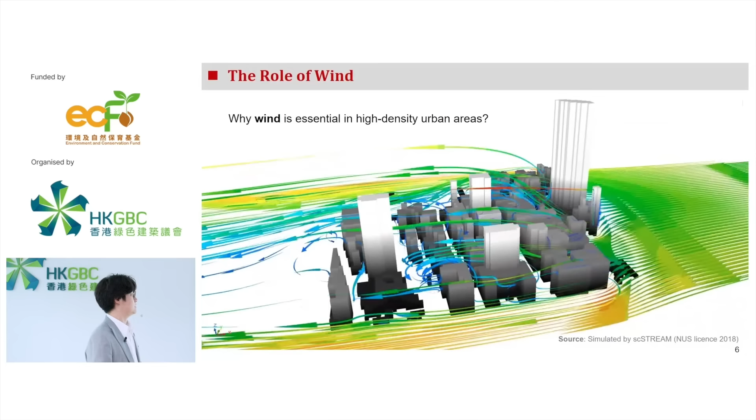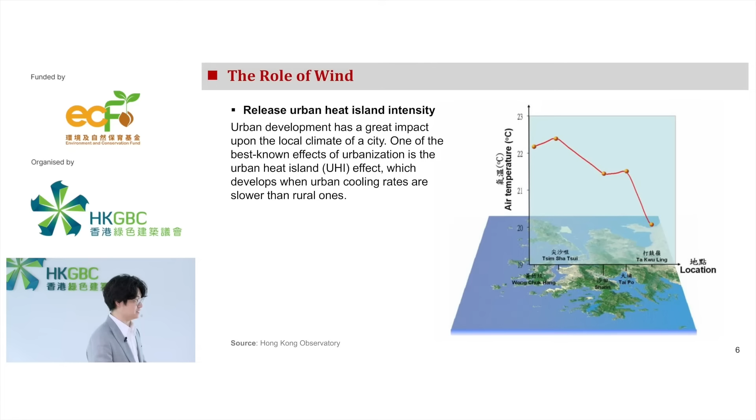In the spatial dimension, we feel warmer and hotter in urban areas compared with rural areas in the same city. This is because urban development has a greater impact on the local climate of a city. One of the best-known effects of urbanization is the urban heat island effect, which develops when urban cooling rates are slower than rural ones. This figure, captured from the Hong Kong Observatory's website, shows that the temperature difference between the city center and rural areas in Hong Kong can be over 2 degrees Celsius during nighttime, meaning we feel hotter at night in Hong Kong's urban areas.

Consistent with these findings from the Hong Kong Observatory, we recently conducted an observation study using over 100 automatic weather stations across Hong Kong and Shenzhen to investigate the magnitude of the urban heat island intensity in this region. We found that during the study period, summer 2022, in the urban high-rise areas of Hong Kong, urban heat island intensities exceeded 2 degrees Celsius, consistent with the findings reported by the Hong Kong Observatory. We also found that in Shenzhen, this number is even larger, reaching up to 3.3 degrees Celsius, meaning they may be suffering more discomfort due to extreme heat.

So this means that for people living in urban areas, we may need more wind to cool down our urban surface and to make ourselves comfortable. And in the temporal dimension, we will feel hotter today compared to 100 years ago.

This is again a record from the Hong Kong Observatory, showing that in the past 100 years, there is an increasing chance of extreme hot weather events during daytime and nighttime in Hong Kong. This is because of climate change issues and temperature rising globally, so our temperature is growing.

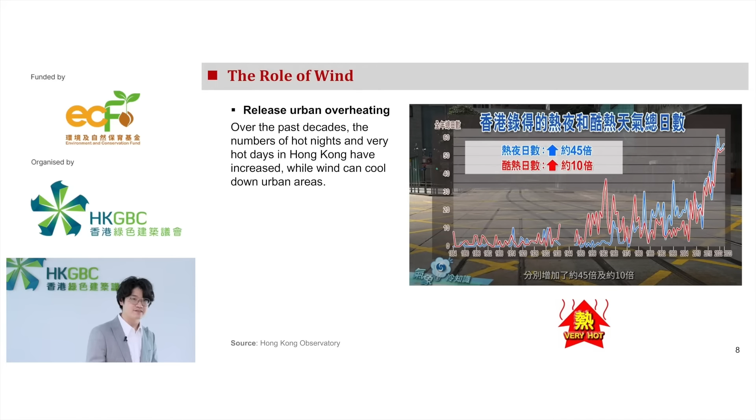In a larger scale, in a calm condition without ambient wind, traffic pollutants and anthropogenic heat may accumulate over urban areas. In comparison, under windy conditions, these emissions are advected downwind and dispersed outside the city. We call these two phenomena urban dome and urban plume.

This again demonstrates that if we have wind, we can have better air quality and we may have a more comfortable atmosphere in our city.

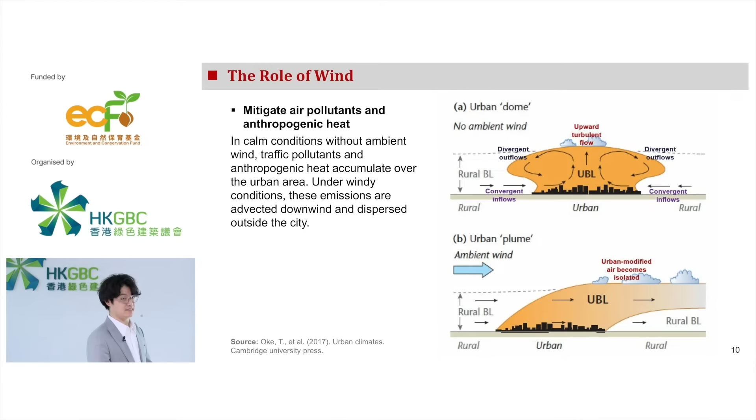More than the benefits we can obtain outside, for the indoor environment, we can also get benefit from wind. Another role of wind is to improve air quality. With good ventilation, the concentration of aerosols and airborne virus particles is reduced, and they are removed from your home more quickly compared to conditions with poor ventilation.

So we now know that we can get a lot of benefits from wind. The next question you may ask is how urban morphologies influence wind behaviors. Without knowing the answer to this question, we may not be able to better decide how to design our buildings so that they can adapt to the climate change, adapt to the ambient wind conditions.

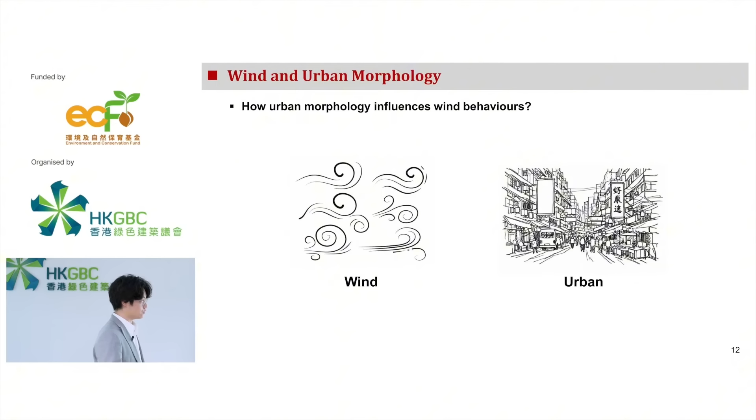We are going to answer this question in the following part. Urban climatologists are very smart. They try to find the answer to this question by using two simple and basic urban units, because they know that if they study the relationship between urban morphologies and the wind environment using the complicated urban system, the answer may be more difficult to find due to so many uncertainties with complicated urban morphologies.

But by using isolated buildings and urban street canyons as examples to show the relationship between wind and morphology, the answer can be more clearly obtained.

By studying this climate process within these two basic units, the isolated building and the urban street canyon, scientists seek to identify general wind behaviors and integrate these findings to explain airflow patterns at the city scale. For these basic units, for example isolated buildings, they figure out some basic air movement patterns.

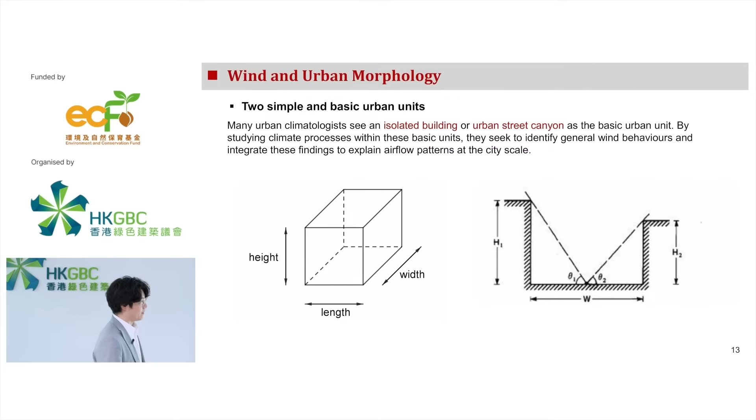At the lateral side of an isolated building, we can also observe patterns of flow separating from the prevailing wind. This is because the building obstructs the original path of the prevailing wind, making the flow separate at the corner of the leeward side of the building.

From the left-hand side to the right-hand side, they define zone A, zone B, zone C, and zone D. Zone A is the upwind area, which is an unobstructed zone, or we can call it a free stream velocity zone. So here the wind is not affected by buildings. And when the wind approaches the building and goes over it, we move to zone B.

This one they call the displacement zone or transition zone, so the flow is transitioning here. Then at the immediate leeward wall side of the building, they call it the cavity zone, meaning the flow here recirculates, and usually has a weak wind speed but a strong turbulence intensity. So the wind here is quite weak.

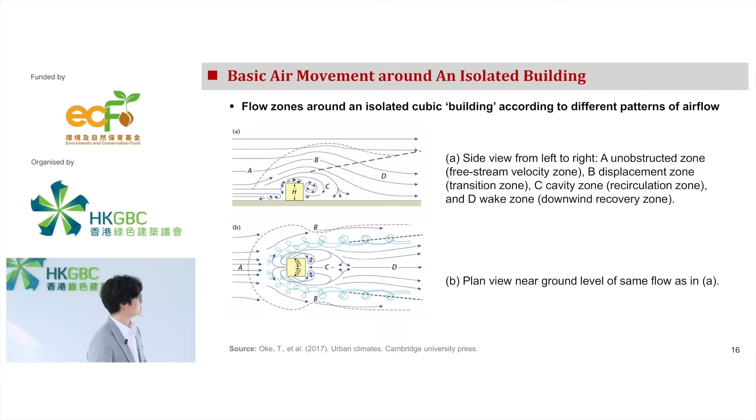The air movement is also affected by the shape of the buildings. If we put the building in this way, with the longer facade, the longer dimension of the building perpendicular to the prevailing wind, they will generate a larger cavity region, and this weak wind region will be large because the frontal area of the building facing the prevailing wind is large. In this situation, we will have a higher form drag.

This generates higher form drag but lower friction drag, which is not good for air passing through these regions. But if we put our building this way, with the longer facade parallel to the prevailing wind, the wind can more easily pass through the buildings, and they will have lower form drag and higher friction drag accordingly. So they will more easily pass through, and the cavity behind the building may be smaller, and the weak wind regions can be reduced.

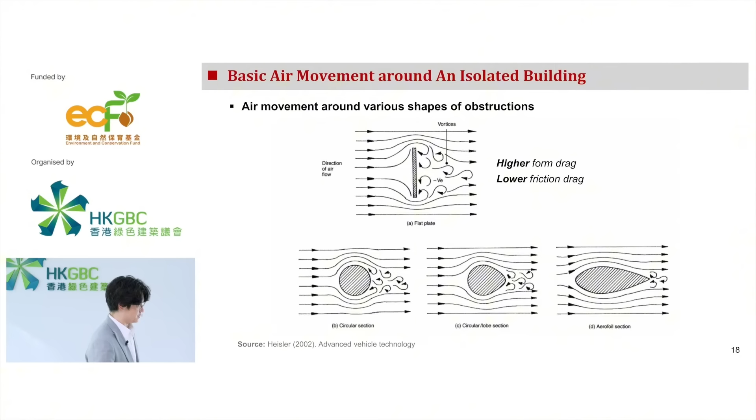So after talking about some basic air movements around the isolated building, let's go talk about another basic unit, the street canyon. A street canyon actually consists of one street and two buildings at its left and right side. The scientists also identify some basic air movements within this basic unit, the street canyon.

Another effect is called the Venturi effect, meaning that when the wind has to pass through a small opening, the wind speed will also increase. So this is another method by which we can accelerate the wind.

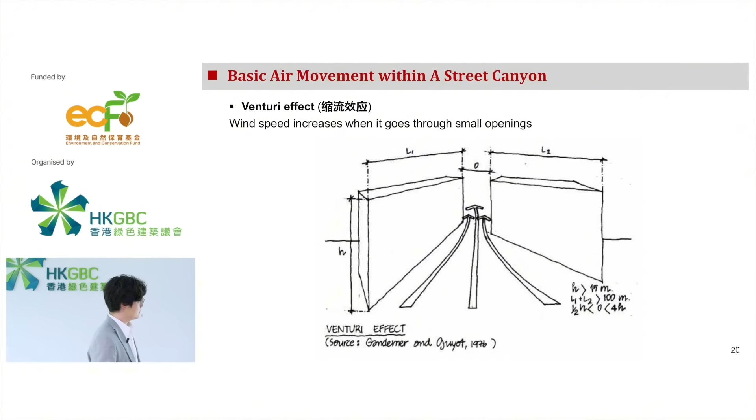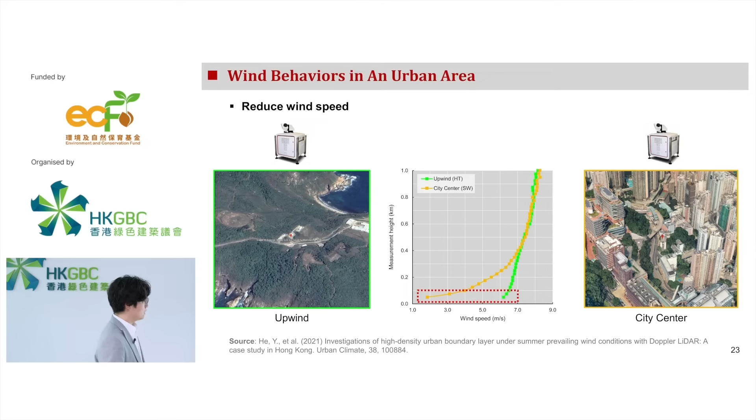In this example, we put the LiDAR equipment, one in the city center at Hong Kong U, and another at the upwind area at Hok Tsui. The terrain here is normally covered by vegetation, so no urban construction is here, while here is one of the high density urban areas in Hong Kong. This is what the equipment looks like.

We can see the observation we have. This profile represents the one we measured at the city center, Hong Kong U, and this green line represents the vertical wind speed profile we measured at Hok Tsui, the upwind area. You can see that the wind speed reduction is over 4 meters per second. This is a huge wind speed loss, meaning we actually have enough wind resources in Hong Kong, but when approaching our city center, the wind speed is reduced, so we cannot benefit from this high wind speed, especially during the summer.

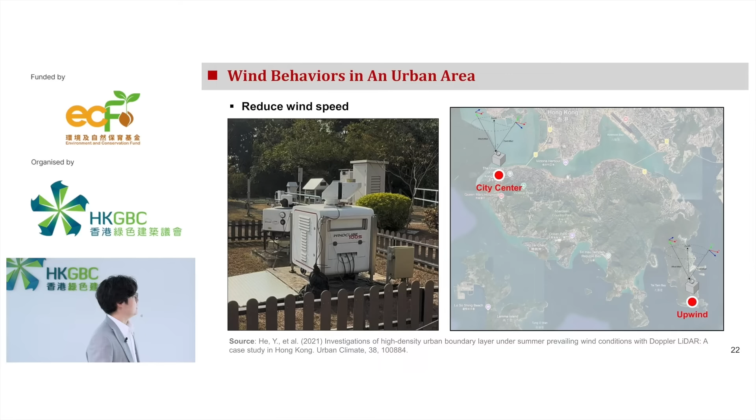Related to this wind speed reduction, we have a term to describe this phenomenon. Usually we call them shelter effects or wall effects. Hong Kong has many wall buildings because of the insufficient land supply. So we build these buildings in a compact style, making them shelter the wind, and they also block the incoming winds so that the wind will be reduced after passing through these wall buildings.

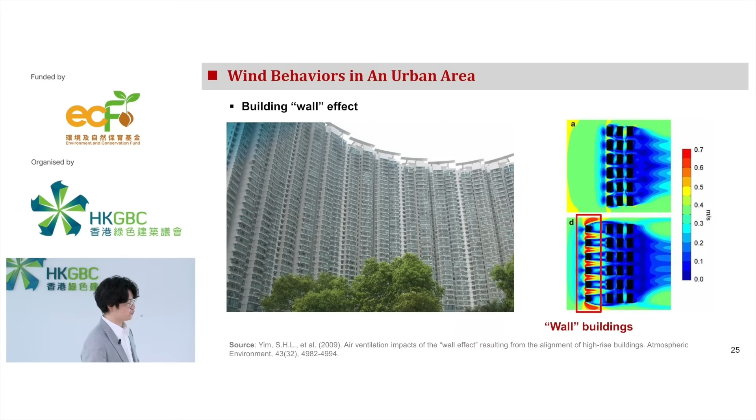This is an example I found online, a CFD simulation conducted by previous research, showing that if we add one block of wall buildings, the wind speed is reduced significantly, so you can see many more blue areas here at the downwind side of these wall buildings.

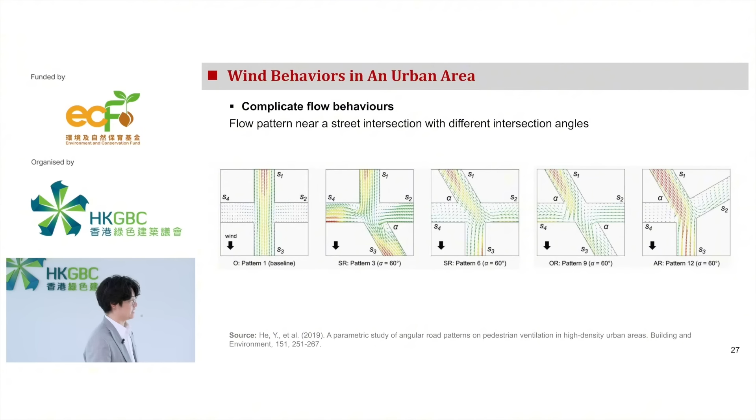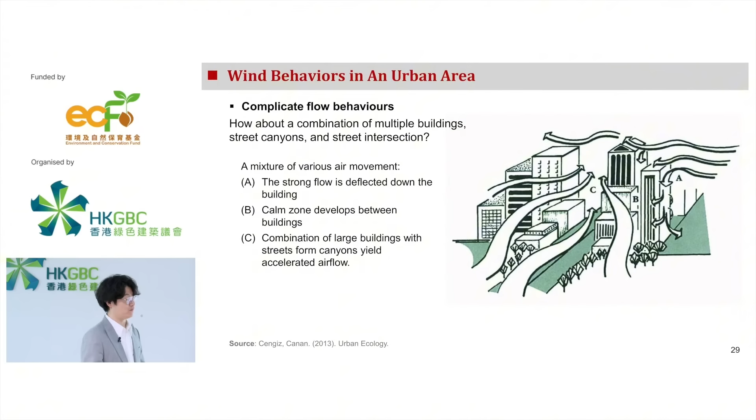So how can we understand the relationship between urban morphology and wind behavior in such complicated urban systems? Scientists introduced a concept to help us better describe or quantify this relationship.

With this understanding, we can further define the urban boundary layer. What is the urban boundary layer? It means the boundary layer over an urban surface. This is how we define the urban boundary layer.

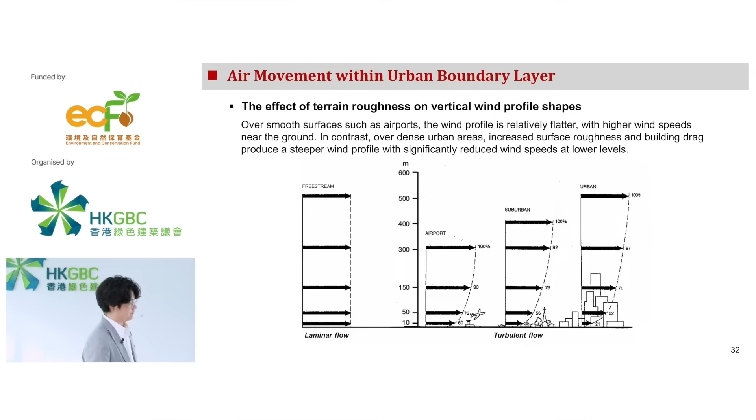If we compare it with high density urban areas, you find that the wind at the bottom is much smaller compared to the airport case, and the curve of this vertical wind profile is steeper, meaning the height of the urban boundary layer is higher than in the smooth surface case. By understanding this, we can identify to what extent our urban surface roughness impacts the vertical wind speed profile.

Okay, so we have finished section 1. This section's information can help us better understand the following parts of today's study, because I will go into a more practical part to introduce the building and urban ventilation design guidelines in Hong Kong. Most of the strategies are based on the understanding of the theory I introduced just now in part A, section 1.

So this is the first guideline I would like to introduce to you. Perhaps many of you already know these guidelines, but I still want to give an overview so that we can better link to section 3 and section D. This urban design guideline provides many air ventilation related design strategies, subdivided into district level and site level. I will go through them one by one.

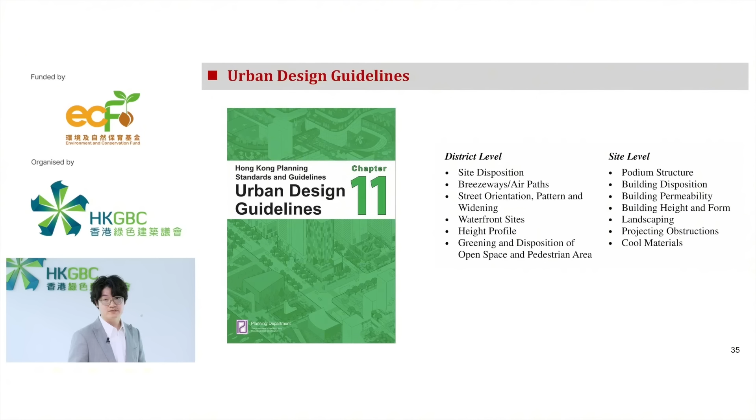This is the first strategy at the district level. It requires us to divide the site into parcels to avoid long and linear site geometries. Because of the building regulations used in building design, in the city center at Tsim Sha Tsui we can easily find these linear and long buildings in these regions. This building design is actually not good for air ventilation.

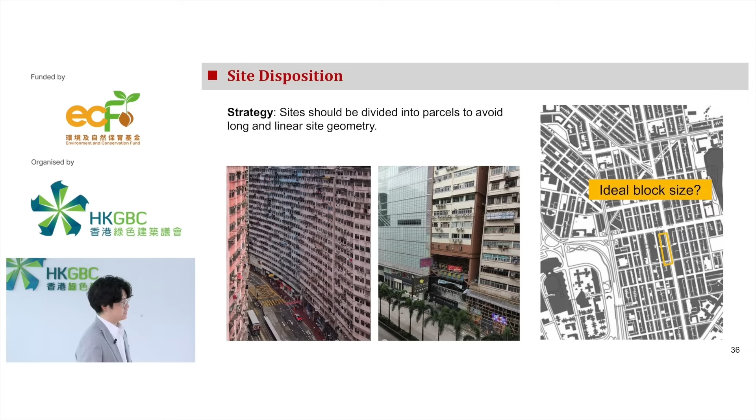So the guideline, the strategy, suggests separating this into parcels so that more wind can be introduced into the gaps between buildings and into the downwind side of the building. Here is a design example. It's not a real design example, but a conceptual one that we can find from previous research.

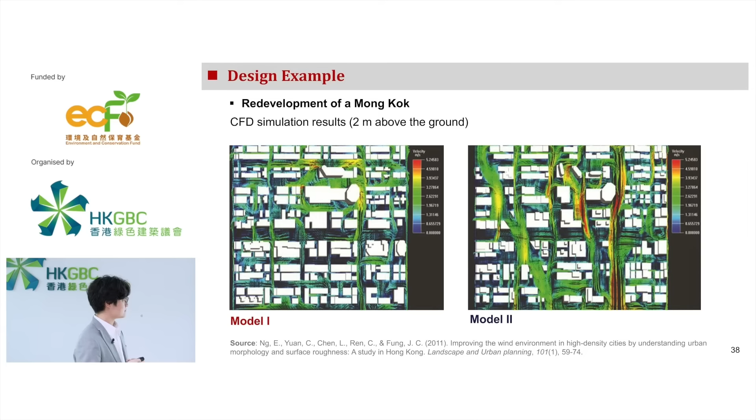This site disposition strategy can actually be extended to the seafront area. This is another strategy from this urban design guideline: they highly recommend separating buildings and dividing the site into small parcels near the sea.

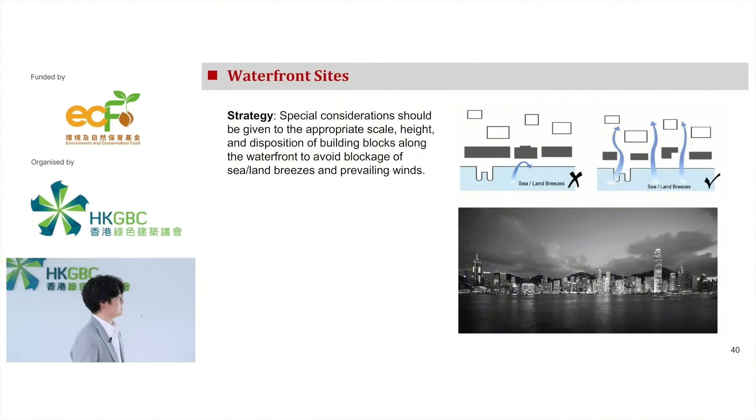This is because wind will come from the open areas at the open sea, and this is actually the major source of strong wind. If we block this area, then the wind is not able to enter the seafront area, and it cannot penetrate deeper into the city center. That's why they suggest these strategies to improve waterfront design.

A very famous example is the design of the Hong Kong SAR government's headquarters. Their building is exactly at the seafront, but to avoid this huge building blocking the prevailing wind from the sea, they dug a large hole, so the wind is still able to pass through this huge building and enter the downwind regions.

By using this, the wind can not only benefit the building surrounding area, but also the downwind area of these buildings. So this is a very famous example of AVA in Hong Kong.

The next strategy is to build breezeways and air paths. We have many separate breezeways, like roads, linear parks, low-rise building corridors, and also building setbacks and non-building areas.

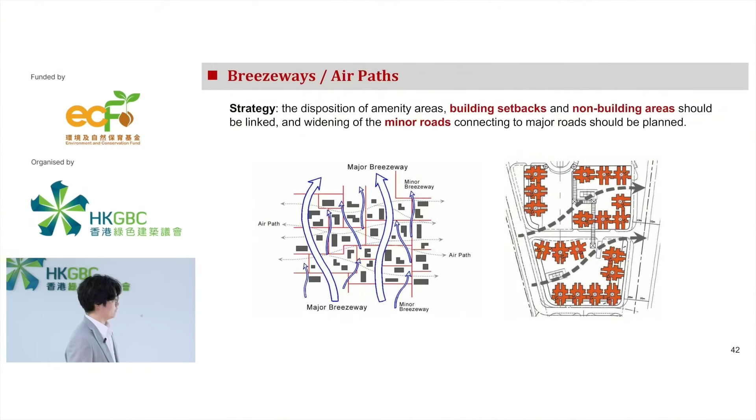But if we don't connect them together, it will not become a breezeway network, and it won't be efficient for wind to flow through our large urban areas. So this guideline suggests connecting all these small, major and minor breezeways into a network of breezeways and air paths.

Another strategy tells us that street orientation is related to airflow behavior. If we can better align our main street orientation to the prevailing wind direction, we have a better chance to attract more wind into our urban building arrays, achieving higher wind speed.

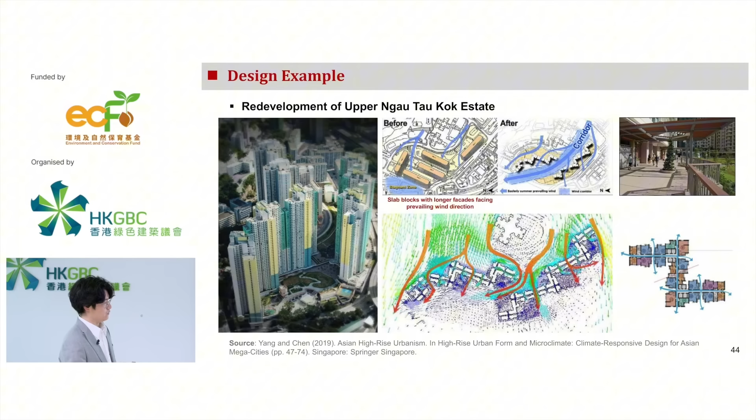This is another good design: they tried not just to build this major corridor, but also introduced some minor corridors, so that even when wind comes from a different direction, they can still have very good ventilation.

So the next strategy is street widening. As I introduced earlier, if the street is too narrow, the wind will skim at the rooftop level and cannot enter down here.

But if we try to widen the streets, then the flow may be possible. More flow can be entered into these streets, enhancing the exchange of air inside and outside, so that we can have better air quality and a more comfortable wind environment.

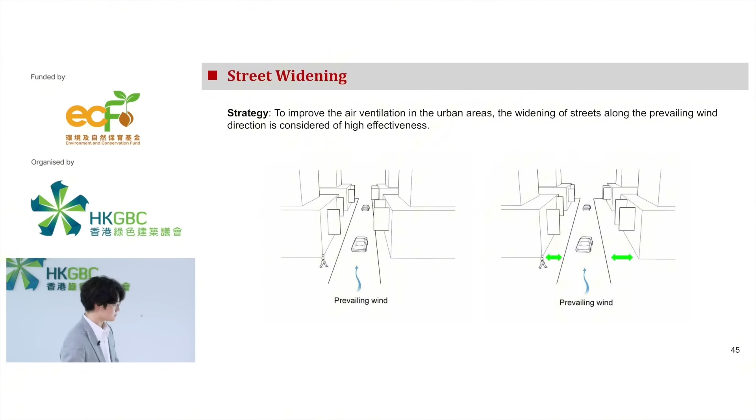Okay, so another strategy is the height profile, so-called downwash effect. If we build buildings at the same height, the downwash effect is not possible. But if we build buildings at different heights, they will make the flow behavior more diverse, and the downwash effect will occur.

From the left-hand side figure, we can see the buildings are built in this way: this is the upwind building, this is the downwind building. The upwind building is lower, and the downwind building is higher. In this way, the wind can pass through more easily because there's no blockage.

When the wind approaches the taller downwind building, it forces the flow down, generating a high pressure region at the windward side of the building. Because here is a high pressure region and there is a low pressure region, this pressure difference accelerates the flow, and we see a higher velocity here.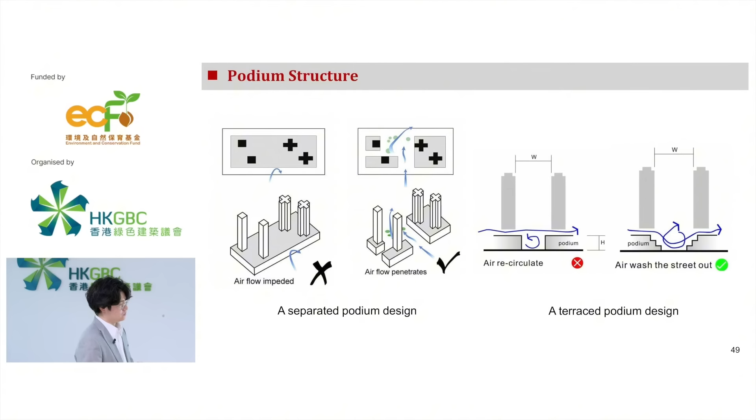This set of diagrams tells us another important strategy: increasing the permeability of our buildings and urban areas. There are different strategies, but the main concept is that we need to dig more holes, introduce void decks, and change the orientation of buildings so that we have less frontal area facing the prevailing wind, giving the wind more room to enter our building complex and bring more airflow into our urban and building design.

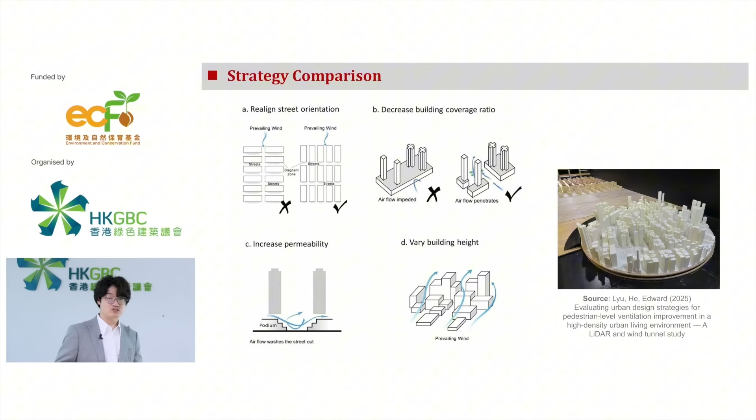Although the urban design guidelines give us many good strategies to consider for improving our air ventilation, the guidelines don't tell us which strategy is better or when we should use which strategy. We don't know this answer.

Recently our team did wind tunnel experiments to compare four different strategies recommended by the guidelines: realigning street orientation, decreasing building coverage ratio, increasing permeability, and varying building height. We used one site at Mongkok as an example and conducted these four redevelopment cases.

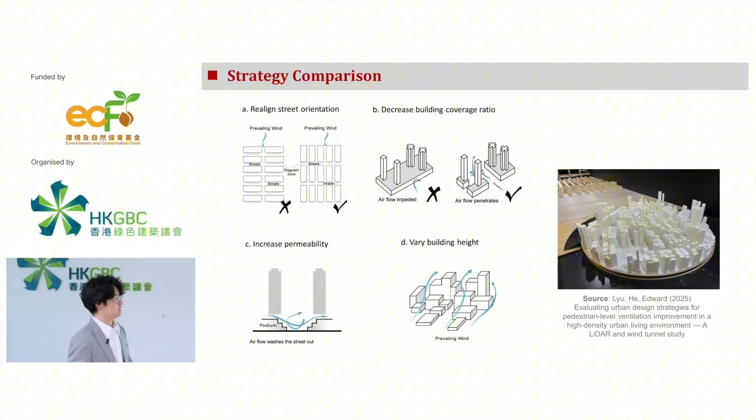This is another study. We further compare the strategy to link the breezeway and to widen the breezeway, comparing these two strategies independently, and also combining them together. We found that because Hong Kong's city center is very dense, relying solely on linking the breezeway or widening the breezeway may not be sufficient to improve the wind.

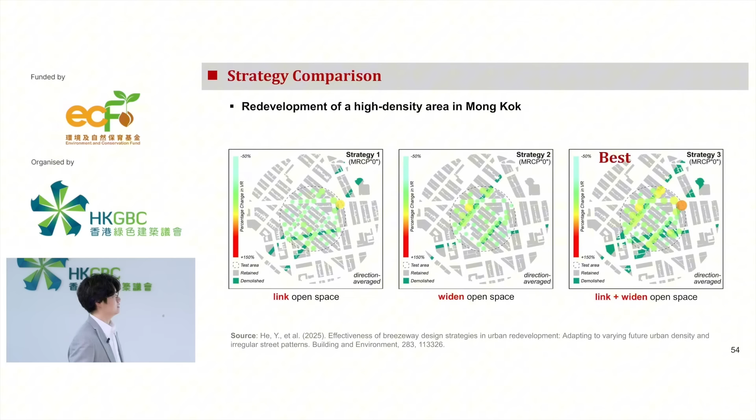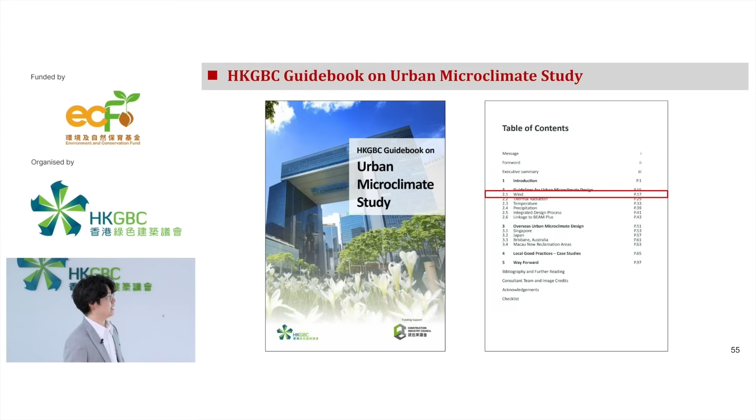This urban design guideline provides us most of the important qualitative recommendations. The HKGBC also has a guidebook on urban microclimate studies, and one section is related to wind. They provide many innovative diagrams showing quantitative design strategies for improving air ventilation. If you're interested, you can definitely have a look, but I will not repeat this strategy in this lecture due to time limits.

So let's move to the next guideline: the Sustainable Building Design Guideline. The difference between this guideline and the Urban Design Guideline is that the Urban Design Guideline looks at the site and district scale, while this one is more at the building scale. The next difference is that the Urban Design Guideline only provides qualitative suggestions, but the Sustainable Building Design Guideline provides quantitative suggestions, including quantitative metrics for us to control the geometry of the buildings and the street.

There are three key building design elements related to wind. One is separation—increasing the separation, increasing the building setback, and increasing the site coverage of greenery. But that last one isn't related to wind, so I won't highlight it in this lecture.

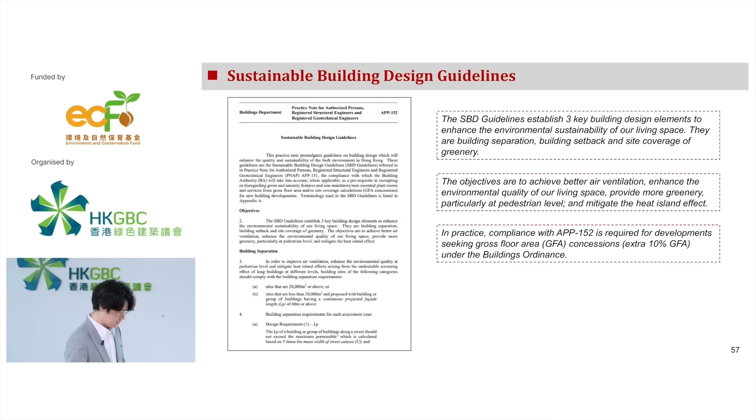The first parameters introduced to us are LP and U. LP is the continuous projected facade length, and U is the width of the street canyon. How can we use these two parameters? They're actually one pair of parameters, and they tell us that we cannot build our building with too long a facade.

So the relationship is: we should not build our building so that the maximum allowance of the length of the building is more than 5 times the width of the street next to it. In this example, there's a different width of street adjacent to the building, so we can only take the narrowest one as the reference for these calculations—meaning the LP dimension of the building is actually 5 times this narrower street, but not the other one.

And this one is the same. The LP maximum is 5 times of this one, but not this one, because this one is narrower than this one. So we cannot use this one as a reference to do the calculation. We can only use this one.

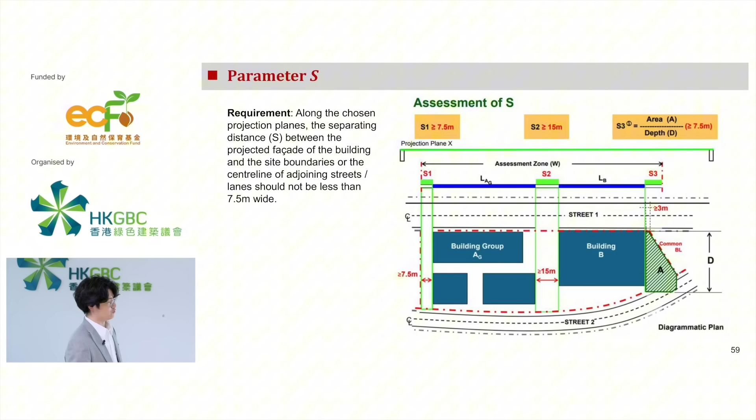Okay, the next one is the S, which means the separating distance. How they control this S is that between the projected facades of the building and the site boundary or the center line of the adjoining street, the length should not be less than 7.5 meters. So if this is the street, this is the center line of the street. Between this center line and the building's projected facade, the minimum distance is 7.5 meters. And if this is the site boundary, between the site boundary and the projected facade of the building, the minimum requirement is also 7.5 meters. So this is how they control this S.

The next one is permeability. Permeability means we have vertical sections to do the assessment. They have 2 types of permeability elements: one is called intervening space, shown in white color, and another is the permeable elements, PE. So the total area of this intervening space area plus this permeable elements area, divided by the total area of the vertical section assessment area, has to fulfill the minimum requirement of 20%. There are more detailed requirements for different situations, but for most of them, it has to be not less than 20% total permeability.

So we know these 4 different quantitative control metrics from the Sustainable Building Design Guideline, but actually we have more parameters or metrics that can control building performance in terms of better ventilation. One famous indicator is called frontal area density. This is similar to permeability, but permeability calculates the ratio of openings exposed to the prevailing wind, while this one calculates the frontal area of the building exposed to the prevailing wind. Different calculation, but similar meaning - they're all controlling the permeability.

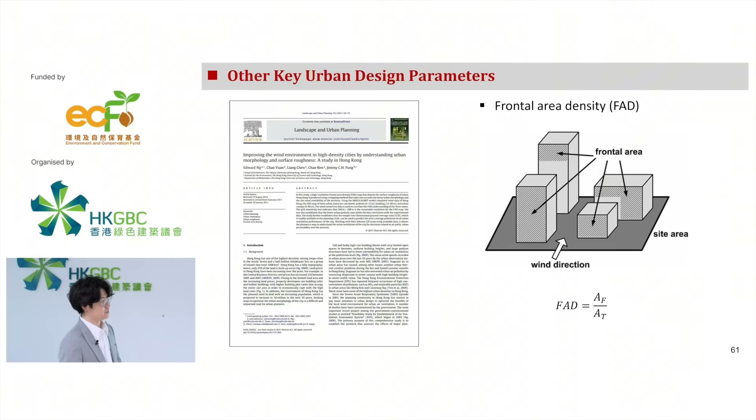In Japan, in the CASBEE system, they also have similar indicators. They call this one percentage of exposure area, and you can see they are quite similar - they have this vertical assessment section, and the frontal area of the building, and they calculate the ratio of the building area to the assessment section area. There's also one called building spacing index, which is actually quite similar to the aspect ratio, but when calculating it, they use a section parallel to the prevailing wind, whereas this other one uses a section perpendicular to the prevailing wind.

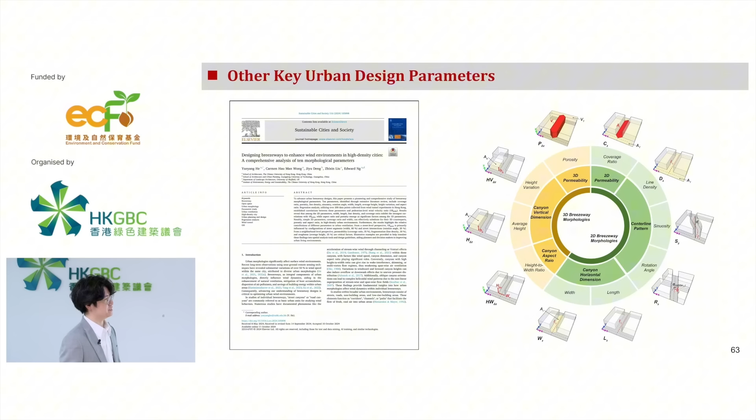We also did a literature review on other important parameters to control the design of open space. According to our literature review results, we summarized 10 most important parameters related to air ventilation performance: building coverage ratio, the plan area ratio, the line density of the street center line, the sinuosity and orientation angle of street intersections, the length and width of the street, permeability, average building height, height variation, and the aspect ratio. Most of these have already been covered in my talk in the previous parts.

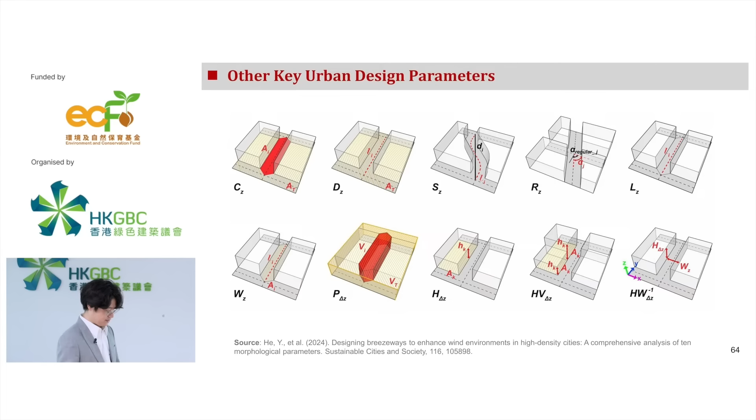What I want to highlight is that not all of these indicators attract enough attention. The most frequently used parameters are coverage ratio, building aspect ratio, building coverage ratio, and permeability. We can also see that height variation, aspect ratio, and wind-to-street angle have more attention, so they are more widely used. So you can find that these 5 indicators may be more frequently used and can attract more of your attention.

Okay, so this is section 2. Now going into section 3, the methods to assess urban wind enhancement. So after the introduction of some background information of the aerodynamic knowledge and the practical aspects related to our building and urban guidelines, we finally move into the method part.

For the method part, we have 3 main methods that are commonly used to study the urban wind environments. This is the classification according to a very famous book called Urban Climates. If you are interested, you can borrow it from a library to read.

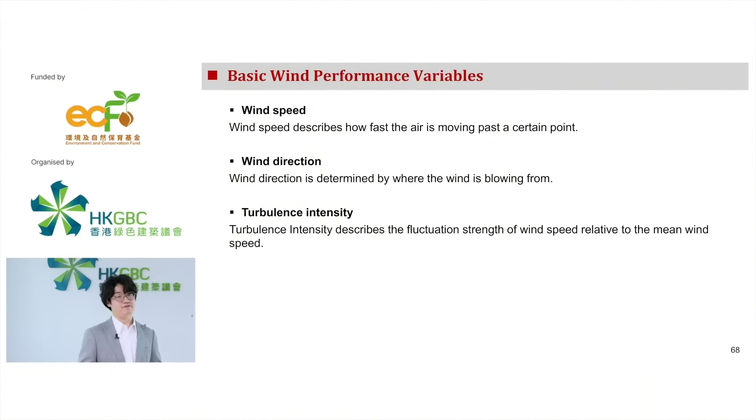This is also important because when we do CFD, we need to input the wind speed as the boundary condition, and we also need to input the turbulence intensity as the boundary condition. We also need to define where this wind is coming from—that is the wind direction. So we have to know these three wind performance variables, otherwise we cannot finish our boundary setting for the CFD.

So there are actually three types of field measurement. The first one we call the fixed measurement type—we have equipment fixed on a particular point to do measurements at that fixed point, so this is called fixed measurement.

And if we put this measurement equipment on a vehicle and it is mobile, then we call this measurement type mobile measurement type.

Sometimes we also need to measure the wind not just near the ground, but also at vertical direction. So what we can do traditionally is put our sensor or anemometer in a balloon, and then the balloon will rise.

And then when the balloon rises to different vertical levels, it can do measurements at those different levels. This is called flow following. It is also one of the mobile measurements, but in the vertical direction. So this is the basic way we can do the measurement.

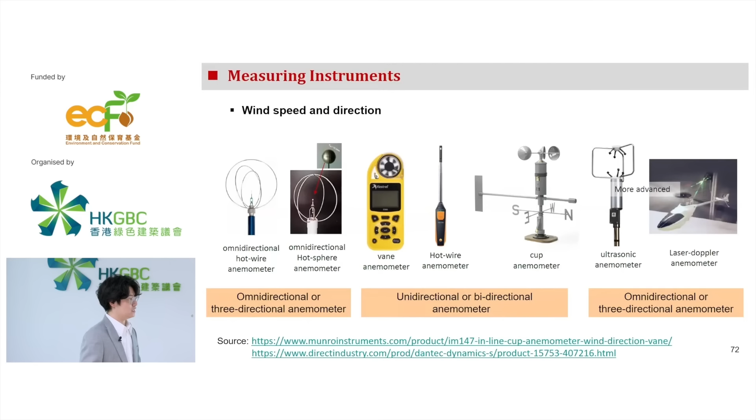And if we don't have money to purchase the anemometer—because they are expensive—and if we don't have a project to support it, it's quite difficult for us to buy an anemometer by ourselves.

But we can actually obtain this data from Hong Kong Observatory. They have free data sets on their website. This is the location of all the automatic weather stations and other weather stations distributed across the whole territory of Hong Kong, and some of them provide wind speed and wind direction data on an hourly and daily basis.

So this is one of the examples I found from their website. They have many different types of equipment, and we can find this equipment measuring different variables of the climate. Some of them are handling wind speed - this one is the anemometer. So they have the anemometer that can obtain wind direction and wind speed.

And the next main method is modeling. So why do we need modeling instead of observation? This is because if we do observations, we can only know the measurement value from one particular point on the Earth, which may not be enough for us to do the air ventilation assessment, because we may need more test measurement points.

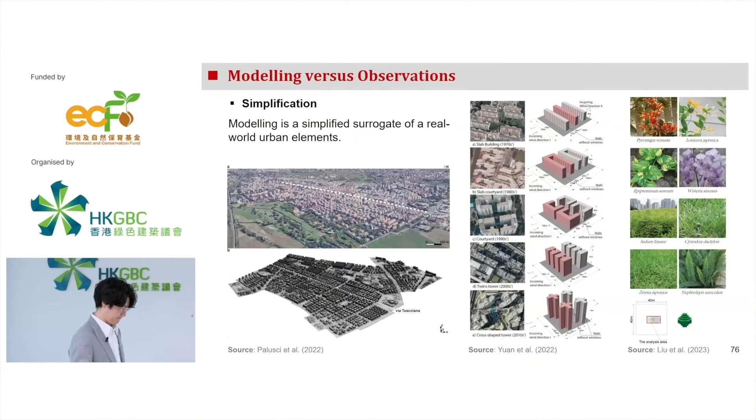So it means that modeling cannot help us capture all the features from reality - this is the disadvantage of modeling. We will lose some information from the real world.

Similarly, if we want to test different patterns of building designs - here are 5 different patterns consisting of four identical buildings but in different layouts - they can easily do it in a CFD simulation. But in the real world, it's difficult for us to do this comparison because we may not have enough budget to build these buildings only for an experiment. In CFD, we can do this simulation very easily and budget-friendly.

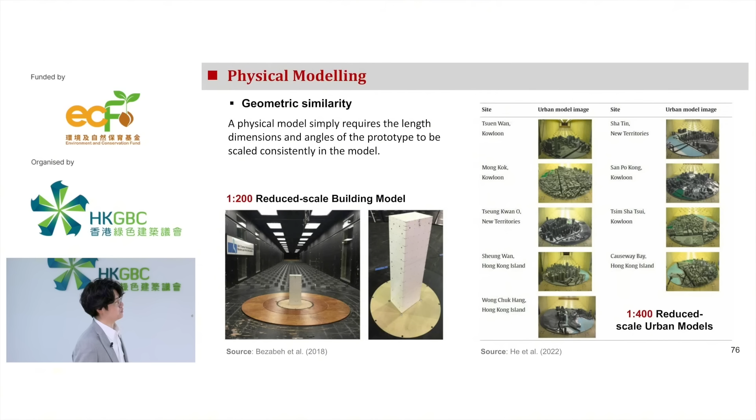So it means that a physical model needs to have the length, dimension, and angle of the prototype scaled consistently in the model.

This is the lab we used two years ago to do a wind tunnel test at Hong Kong University of Science and Technology. In this wind tunnel lab, this is the test chamber, a very simple chamber, but it actually has 6 faces: 2 lateral walls, 1 ceiling, 1 floor, 1 outlet, and 1 inlet. The inlet lets the wind come through, and the outlet lets the wind escape from the test chamber.

So what we did is that, because the very first step when we do the wind tunnel test is to reproduce the real-world vertical wind speed profile. If we have nothing on the floor, the wind speed will be similar from the bottom to the ceiling. In the real world, if the wind goes over a smooth surface like the open sea, the wind speed will be constant at different vertical levels. But when it goes through a rougher surface, the vertical wind speed will have a curve, and if the roughness is higher, this curve will be steeper.

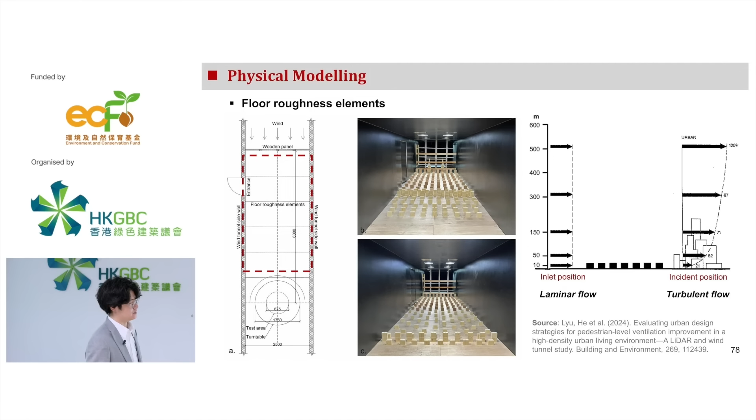So to reproduce this flow pattern, this vertical wind speed profile, we need to set up wooden blocks in the upwind area of the test chamber, so that they can simulate the roughness and the vertical wind speed profile observed in the real world. By putting this roughness at the upwind area, we can change the flow from the inlet from one curve to another.

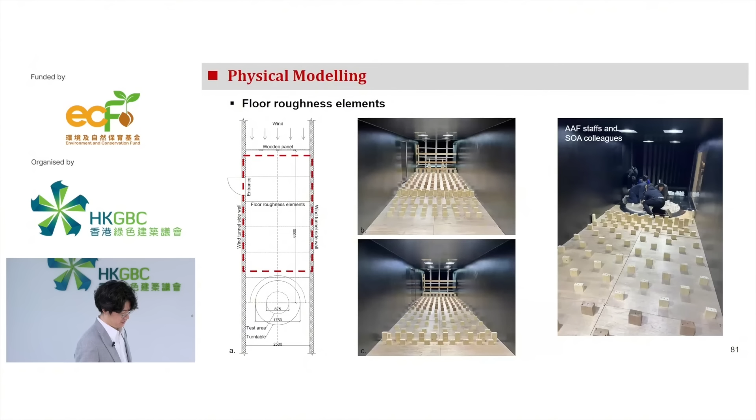This is the very first step, and this is our team and the staff in this lab. We worked together to set up this roughness at the upwind. After setting up the upwind, we have already calibrated the vertical wind speed profile.

The next step is to set up the urban model, because we need to test the wind performance at the pedestrian level in this urban area. So we need to put our urban model at the test area. There's a turntable here that allows us to turn the urban model placed on top of it, so that we don't need to manually rotate these models.

We need to rotate this model because it allows us to test different wind directions, since AVA and CFD require us to test 16 wind directions, from east, west, and north. After putting the building models on top of the turntable, we also need to put sensors at different places on the street. These sensors connect by cable, and the signal is transferred back to the receiver, which helps us collect the data.

So this is a video I found, and it can show us how a wind tunnel experiment looks like.

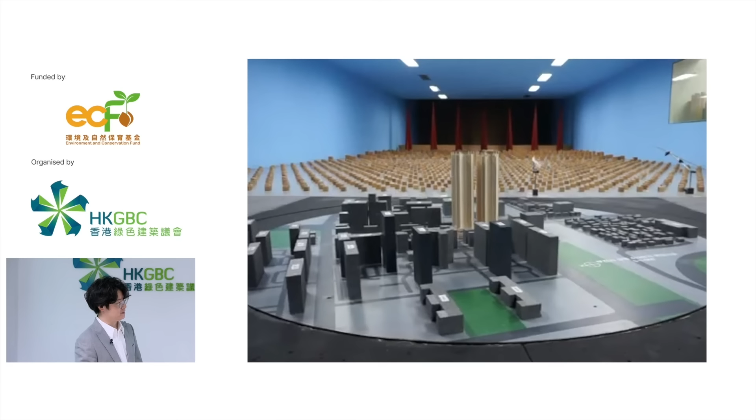You can see that the wind is actually coming from the inlet. This is the inlet, and these are the roughness elements. When the wind passes through this area, the vertical profile changes, and then it approaches the urban area. This is the turntable, and because it can turn in different directions, it can test 16 different directions to have a comprehensive assessment of the pedestrian level wind speed.

So this is an example I found to show you the physical modeling part. Okay, let's resume the lecture.

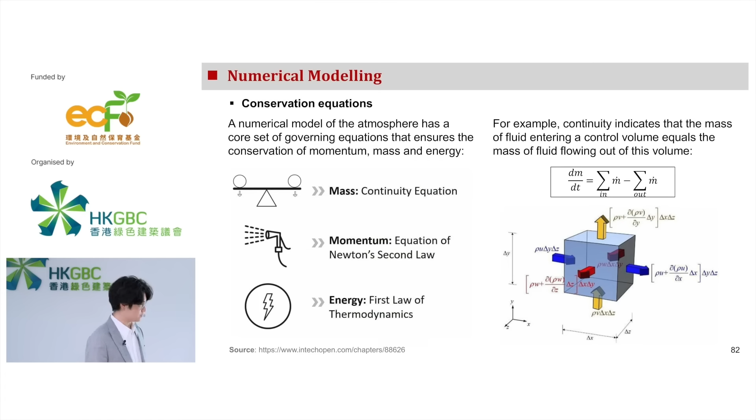We just talked about numerical modeling. The numerical modeling needs to solve different sets of equations, including the mass equation, momentum equation, and energy equation. We won't go through this part in detail, but let's move into other important parts of numerical modeling.

First, we need to understand that numerical modeling has different scales. From larger scales to smaller scales, it requires us to input different levels of detail in the geometries. For our AVA and CFD, we need to input the building geometries in a more detailed way. Actually, the CFD needs to handle the neighborhood and building level details. So this is the scale we are working in.

And the second part is the software. Actually, there are different types of software available in the market, and we can classify them into two categories: open source and commercial. Open source means it's free, and commercial means you need to pay.

The advantage of commercial software is that it comes with a graphic user interface, and some of them have technical support, meaning it's more user-friendly. But open source software, because it is free, most of them have no graphic user interface, and you may need to know some programming skills.

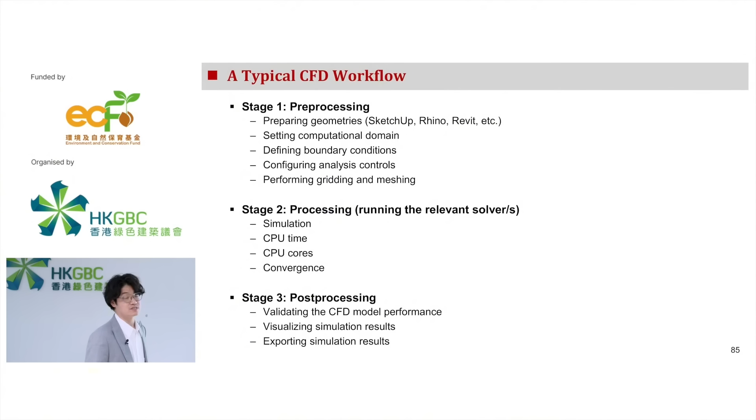Now we have talked about the computational domain. This is the first step when we do the CFD setting. Why do we need a computational domain? For example, we are going to test the wind speed of this target site. We need a domain because the real world has no domain, but we cannot put the whole real world into our CFD model, right? Because it's not affordable for the computer. So we have to tell it where the boundary is for the simulation. Okay, so this is the computational domain.

You may ask another question - I already answered why we need a domain, so the next question is why we need a bigger domain. Why can't we just use a smaller domain since our target is very small? That's because in the real world this domain boundary doesn't actually exist. If we put this domain boundary, it will actually affect the wind. When we run the simulation, this domain will affect the flow passing through it. If the domain is too small, it will impact the flow near the boundary, giving additional and unnecessary wind pressure to the flow surrounding the area, making the results around our target area inaccurate. That's why we need a larger domain.

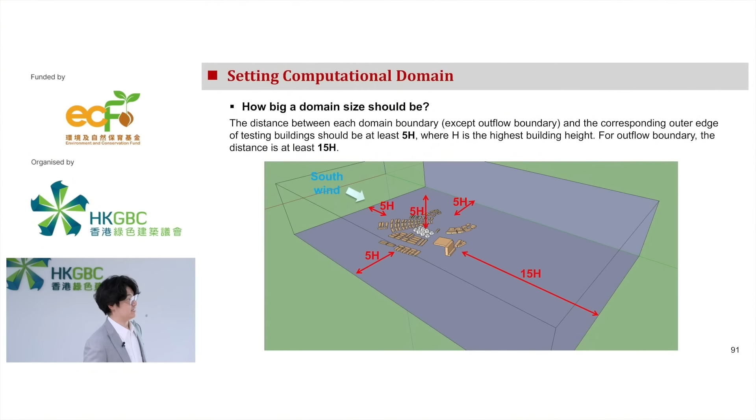This diagram further explains why we need a longer distance between the building and the downwind boundary. This is because the wake area, the flow recovering area downwind, is very long. So to ensure this flow can freely develop, we need a longer distance between the downwind boundary and our site.

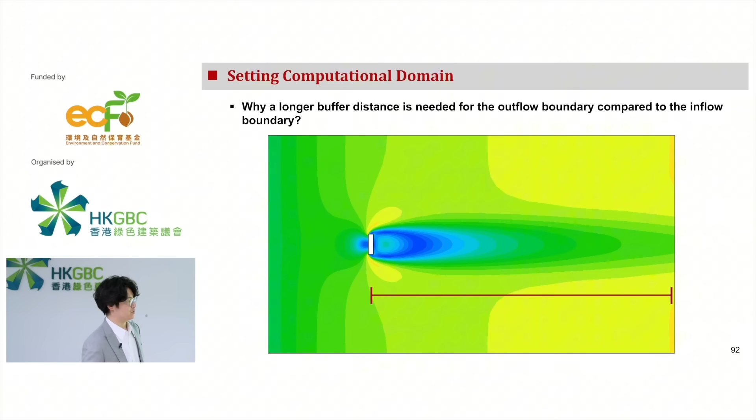After setting the domain, we also need to set the boundary, same as the setting we observed in the wind tunnel lab. We need an inlet, an outlet, two lateral walls, a ceiling and a surface. So we normally have 6 facades for simulation of an urban case.

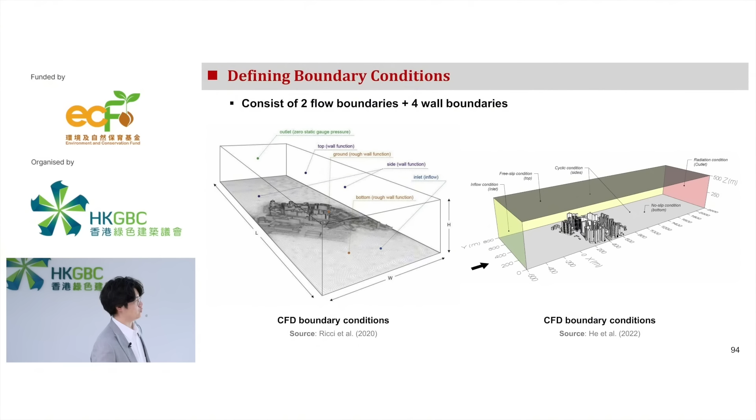For each different boundary, we need to set a different computational boundary condition. For the inlet, we input the inflow, and for this one we set the outflow. For the top and lateral boundaries, we set the wall function. For the ground surface, because we need the flow to experience some roughness before entering our urban area, we set the rough wall function.

After setting the domain and boundary conditions, the next step is numerical discretization. We need to tell the computer in what spatial resolution to generate the simulation results, so we subdivide our domain into different pieces. Each small space is a computational cell, within which we calculate a number of different variables. So one cell will contain one wind speed.

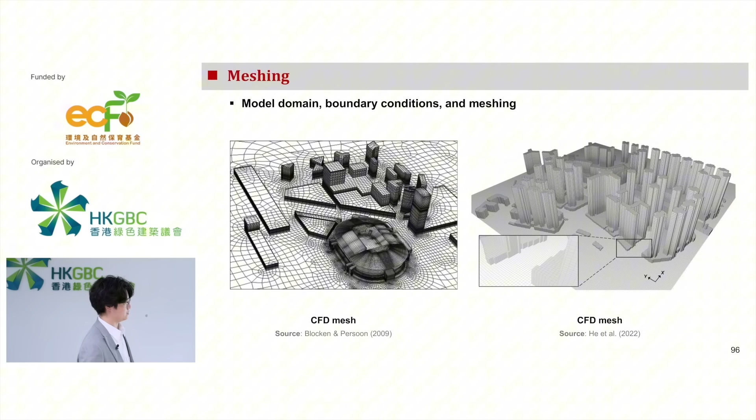This is how the mesh looks. We actually have two different types of mesh: unstructured mesh and structured mesh. Structured mesh is more regular and uses a Cartesian system, while unstructured mesh can better capture the details of building geometries, especially on facades or very small elements in our urban area.

After meshing, the next step is configuring the analysis control. There are different turbulence models we can select from: RANS, LES, and DNS. RANS solves only the time-averaged flow with a turbulence model. In our AVA tests, we are required to use RANS. LES and DNS take longer to simulate, but of course provide more accurate results because they solve all or part of the turbulence eddies. The cost is that you need longer computation time, so it is not required by the AVA at this stage.

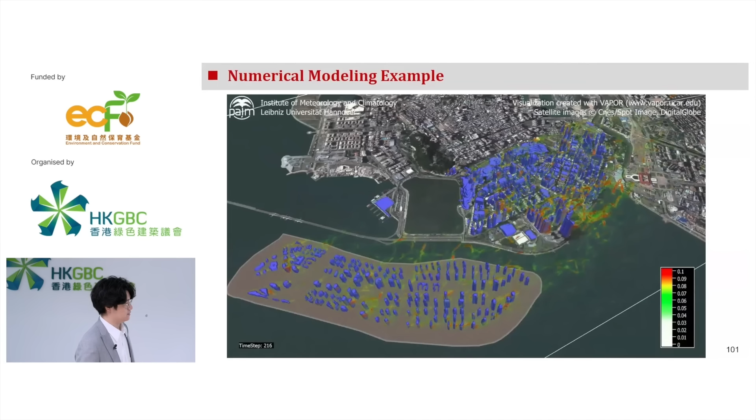This is an example I found online showing an LES simulation. This is one of the urban areas in Macau. This is just a simulation showing the flow patterns passing through this urban area.

To summarize this part, we introduced the observation and modeling methods, with their advantages and disadvantages. For field observation, the advantage is that it records real-world conditions, but the disadvantage is that it lacks experimental control. In comparison, physical modeling is also expensive, particularly needing specified facilities, manpower, and technicians to support it. Because it's conducted in a lab environment, the model scale needs to be reduced, so you need to ensure similarity of geometries so that your results are reliable.

For numerical modeling, an advantage is that it is budget friendly, but the disadvantage is that compared to physical modeling and field observations, there is no measurement data. So you need to validate your numerical model before using it for parametric study, so you can convince others that your simulation is accurate and reliable.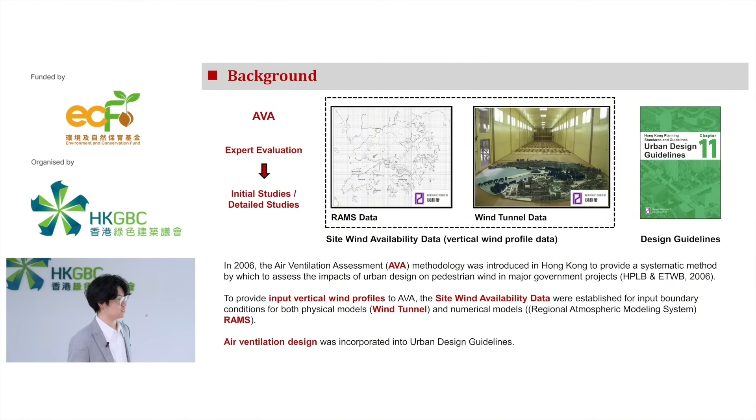For the project, AVA did not require all projects to conduct the tests. They have different requirements for government and non-government projects. For government projects, all major government projects are normally required to participate in this AVA test. But for non-government projects, it's on a voluntary basis. However, non-government projects have motivation to participate because if you can pass the AVA, it may help your project add property value, or for example in the Hong Kong BEAM Plus assessment tool, they will give you extra credit points and bonus. So this is all extra motivation for non-government projects to join this AVA test.

For the AVA test, it did not rely on the absolute value of wind speed as the evaluation indicator. Instead, they use a normalized wind speed as the indicator, called the wind velocity ratio. So how to calculate this wind velocity ratio? This is the equation. The wind velocity ratio uses the symbol VR. It is the ratio of the wind speed at 2 meter height at the pedestrian level to the wind speed at upper level, say 500 meter high.

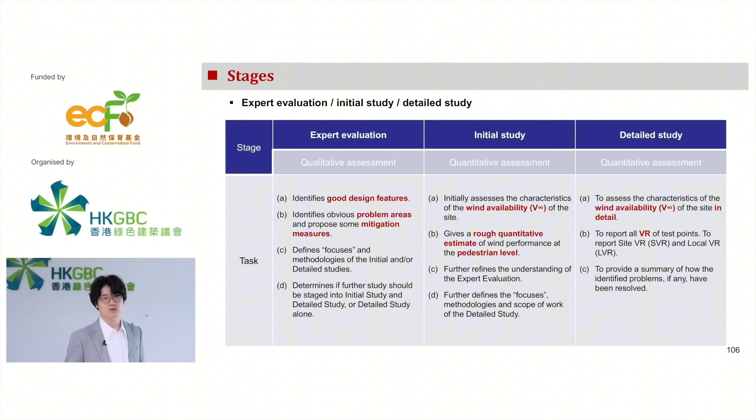Although I said expert evaluation is a qualitative assessment, some expert evaluations also involve assessment using some simple geometry indicators to help finish the assessment. So this part is a little bit quantitative, but overall it requires no quantitative assessment, only a qualitative assessment.

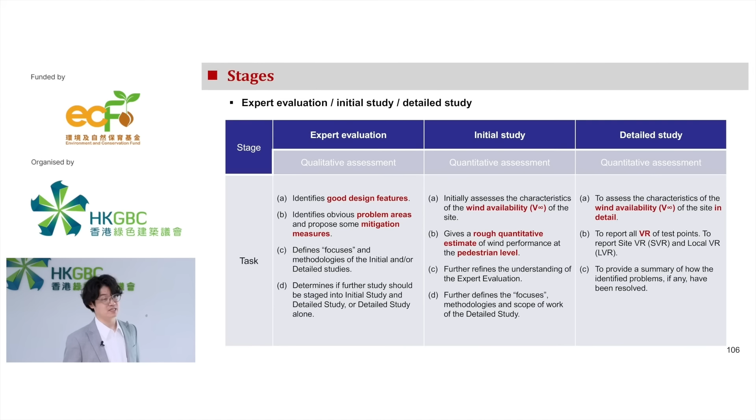If a project has been determined to need further investigation, it will go into the initial study and detailed study, where you need to use wind tunnel and CFD simulations. For an AVA project, in general, they need us to test 16 wind directions. But for the initial study, they allow some simplification - we only need to simulate the probability of wind coming from a reduced set of directions that exceed 75%. So no need to finish all 16 wind directions. Finishing 16 directions is a huge amount of work because for one scenario you need to do the simulation 16 times.

And if you have more than one scenario, then you need to run many simulations. So for the initial stage, they allow this kind of simplification. But for the detailed study, no simplification is allowed according to the technical circular we can find online.

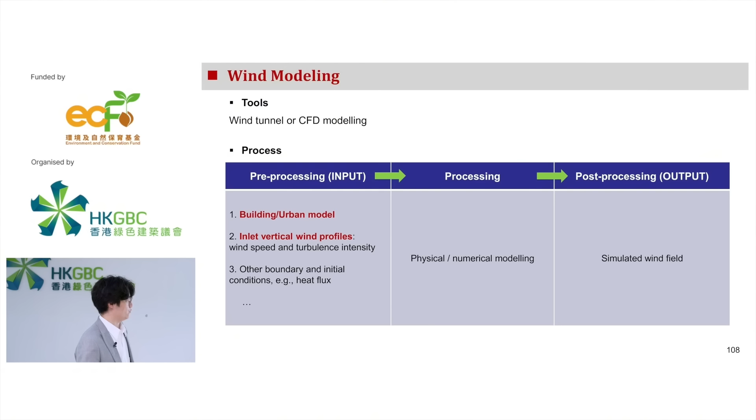The AVA process is similar to the CFD and wind tunnel process. They also have pre-processing, processing, and post-processing. For the pre-processing, you need to prepare the building urban model, and the inlet vertical wind speed profile from the site wind availability data. At the current stage, AVA does not require us to input any heat flux or radiation-related microclimate conditions. It only requires us to do the CFD in a neutral condition, so this part is not required.

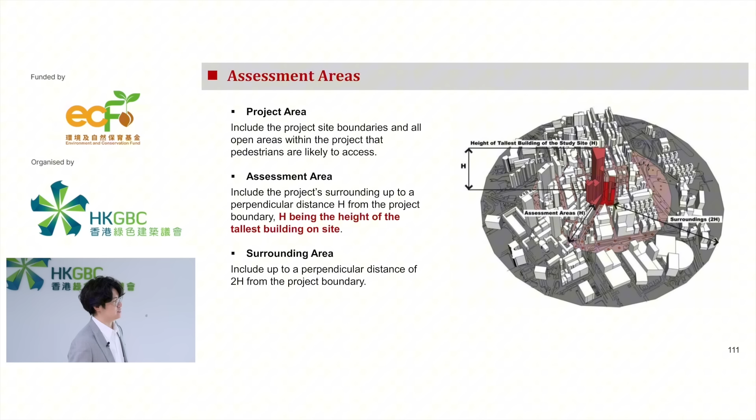So why do we need to include the assessment area and the surrounding area? That's because AVA requires us to simulate the impact of the surroundings. If we remove this surrounding area, the wind would approach the target building directly, which isn't realistic, because in the real world wind needs to pass through the surroundings before approaching your building. So to help us simulate these surrounding impacts, they require us to have this surrounding area with a radius of 2h. This is the setting and the reason behind it.

For the test points, they also classify them into three different types. The first one is the test point placed in the project area - the one in the very mid-center. The overall test points will be placed in both the project area and the assessment area. There are some other special needs for testing points, but these two are the more common ones. The detailed AVA test will require us to report on both of these test points.

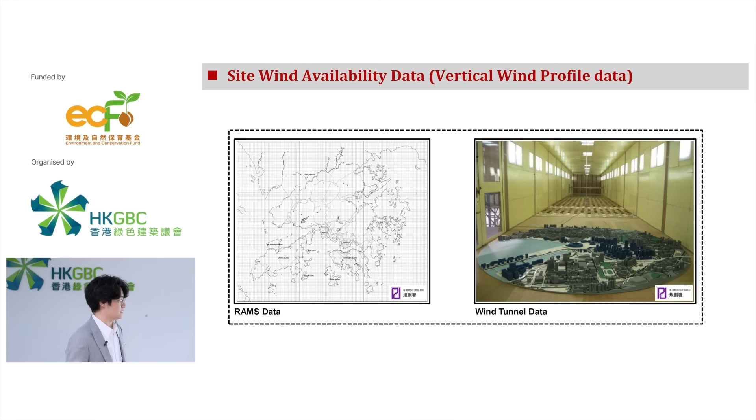Now let's talk about some site wind availability data. This is actually the vertical wind profile data in Hong Kong. Currently, the government has established two different sets of vertical wind speed profile data: one simulated by the RAMS model, which is simulation-based data, and another that is wind tunnel-based data. You can find this data from the Hong Kong Planning Department's website - here is the link. You can click into it and find a list of data. The very top one is the numerical data simulated by the RAMS model, and the rest are data sets obtained by wind tunnel experiments.

So what are they? This is how the RAMS data looks - you can see the whole territory of Hong Kong, divided into different cells, each 500 meters by 500 meters. If you click into one of them, you can find this data, which provides the vertical wind profile in different direction sectors. It can also provide you detailed wind speed data or wind direction data at 500 meters, 300 meters, or 200 meters.

Another data set is from the larger scale wind tunnel. In the past, Hong Kong still has this very large wind tunnel lab, and they do a wind tunnel simulation at each test point. For each test point, they input 1:2000 topography models, and then they can help us simulate the upwind topography impacts before entering the target area. Then they can obtain the vertical wind speed profile and the vertical wind turbulence intensity profile. The advantage of this data set compared to the RAMS data set is that it may be more accurate because it is completed by physical modeling using a wind tunnel.

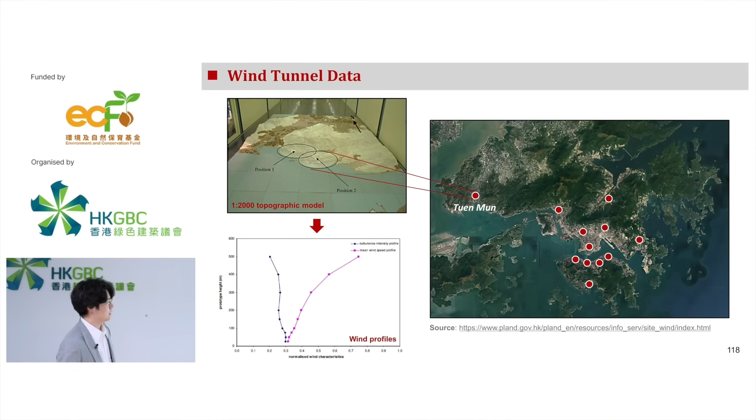To complete the calculation of these two equations, you first need to know the terrain-related variable. For the power law, you need to know the power law exponent, alpha, which is related to the type of terrain on the upwind side you are going to test in your AVA or CFD. For the log law, you need to know the roughness length, which is also related to different terrain types.

Another input you would need to finish this calculation is the wind speed at reference height from the ground. This is a necessary input. If you don't have this data, you cannot finish the calculation of the power law and log law.

So how can we find this wind speed at reference height? One option is to refer to the RAMS data sets. Because they not just provide the vertical wind profile, they also provide detailed wind speed data annually, for summer and winter. You can find the 500 meter value and use the wind speed at 500 meters and wind turbulence intensity at 500 meters to finish the power law or log law calculation.

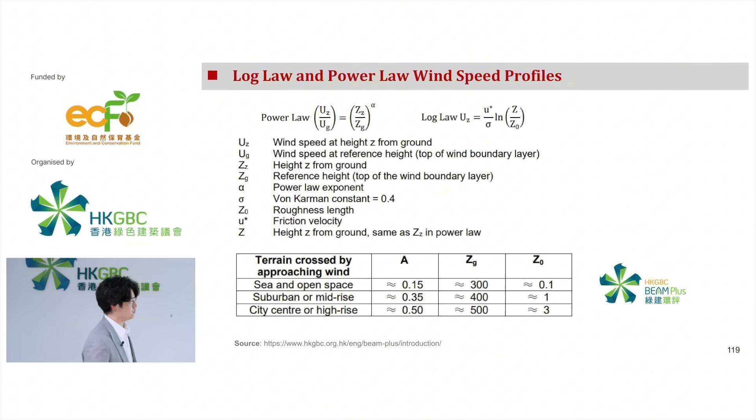Alternatively, we can also find the data from Hong Kong Observatory. They have wind speed and wind direction information at automatic weather stations. You just need to find the nearest weather station to your project site, then use their data. They also provide the location and altitude of the anemometer at the weather station, so you can obtain the reference height and reference wind speed. So these two options are both okay to support the calculation of the power law and log law equation.

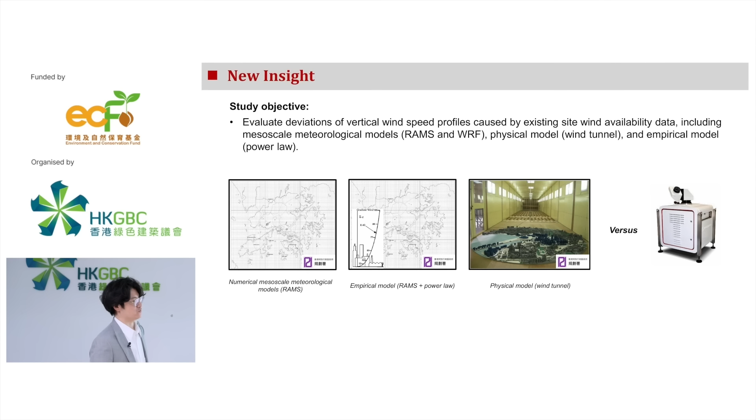But at the time they were establishing the AVA, they did not have any reliable measurement devices that could measure the vertical wind speed profile. So what we are doing in recent years is using LiDAR equipment to compare different vertical wind speed profiles. We put it into the CFD, do the calculations, and compare the performance of different site wind availability data using our LiDAR observation as the benchmark for this evaluation.

We find that this includes the wind tunnel site wind availability data, RAMS availability data, the power law, and another vertical numeric mesoscale modeling data set. By comparing these different site wind availability data, we find that in suburban areas, most of them perform very well, especially the power law, RAMS, and wind tunnel measures. But for the city center, they perform worse. Still, some perform better than others — for example, the wind tunnel and the power law both perform better than the others.

So here are the takeaways. Our finding is that comparing the wind tunnel site wind data and the RAMS data, the wind tunnel data performs the best. However, the wind tunnel data is not available at all sites.

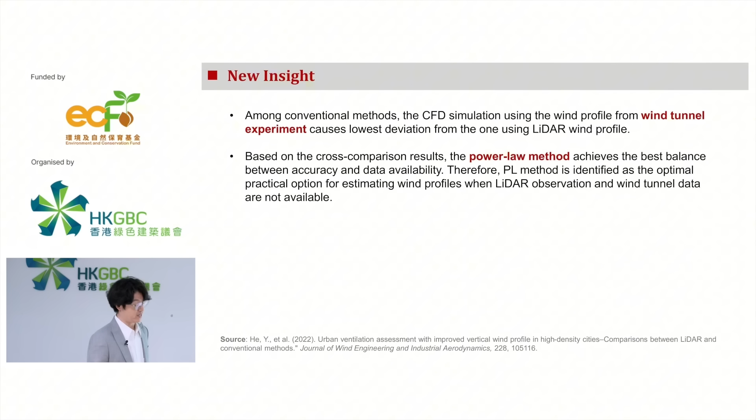So the power law can be the most optimal option that achieves the best balance between accuracy and data availability. So how do you use the power law? You can refer to the Hong Kong Observatory's guideline, or the Hong Kong GBC's guideline.

The final part is that we also want to introduce the relevant credit points in BEAM Plus. BEAM Plus provides many different assessment tools. All the guidelines and methods I introduced are related to building a sustainable city and building, so they include different parts of these guidelines.

For example, for the new building assessment tool, there is a section called Sustainable Sites, SS. We can easily find these credit points related to the guidelines I mentioned. For example, this SS is related to the urban design guideline.

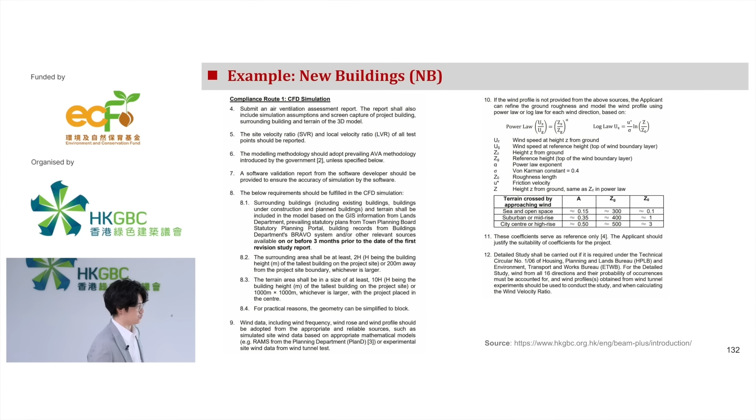This part is related to the sustainable building design guideline, and this SS part is related to the air ventilation assessment guideline. This is a more detailed description to help answer how to more accurately use CFD to do the AVA test. You can find this information on the Hong Kong GBC's website.

Finally, I would like to introduce our recent study. Because CFD and wind tunnels still require specific skills and facilities, we are doing some new attempts to create simpler methods to provide an alternative assessment method for wind speed. This is the example we are doing.

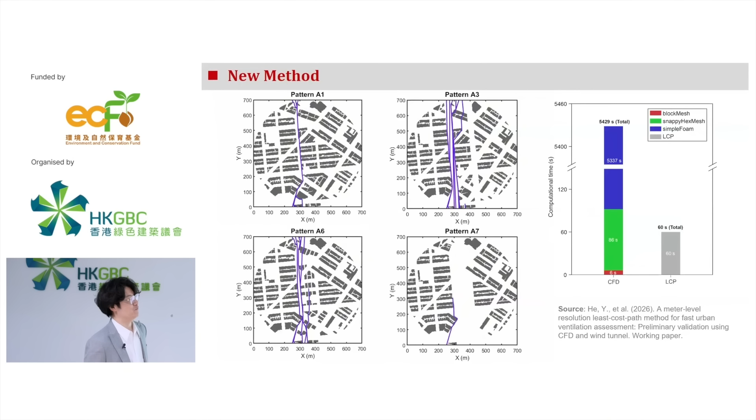We rely on the least cost path method to do some automatic calculation, so we can have very quick simulations without requiring specific skill from the users. We are still developing these methods, and hopefully we can develop this to help you save time when doing air ventilation assessments.

So this is the end of our lecture. Thank you.

So for the first question, in the wind tunnel, how do we measure the wind velocity? I cannot see the sensor in the photo. Okay, we can go back to the wind tunnel part.

For the next question: for CFD simulation, if the upwind distance is set larger than 5h, say doubled to 10h, how will that influence the simulation results? Okay, this is a more complicated question.

Why did the guideline not suggest making this 5h longer? This is because the purpose of the upwind area is to maintain the inflow from the inlet boundary to the incident position, and the roughness here is not sufficient to support maintaining the profile from the inlet to the approaching position.